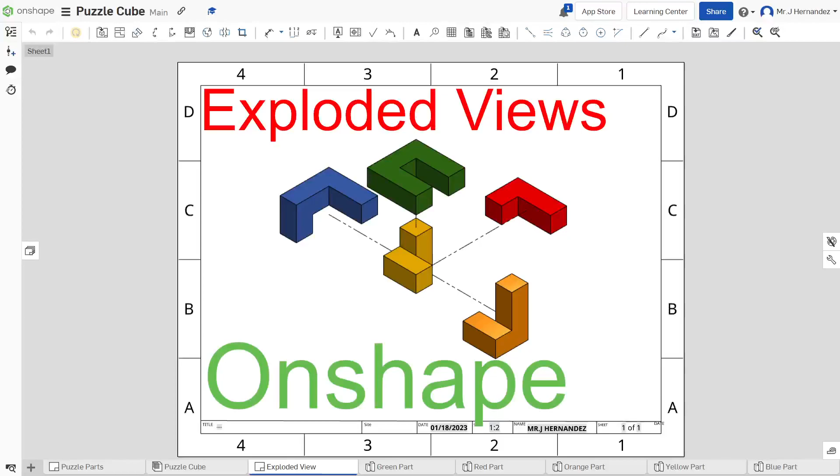So today what we're going to do is take a look at what an exploded view is here on Onshape. This is the final product, a drawing with our exploded view so everyone can see exactly how your assembly is put together and how all the parts fit together. This is really crucial when you have more complex assemblies, to show everybody how these parts fit and move and interact with each other. It's a good way to give someone a good idea of how things are going to work.

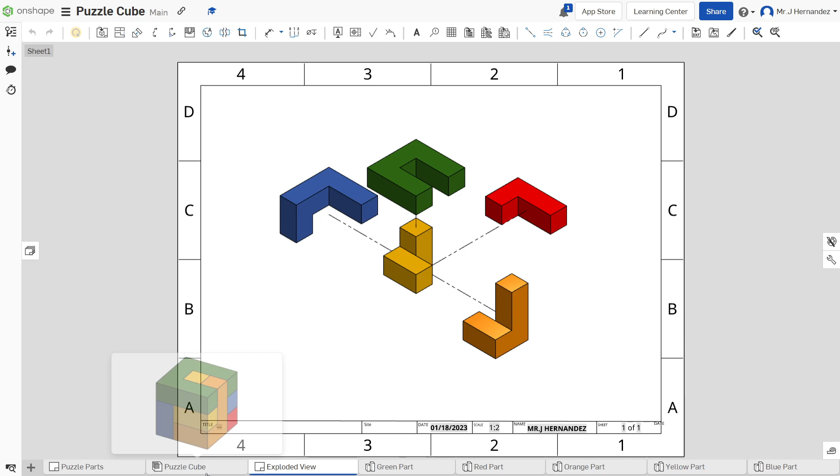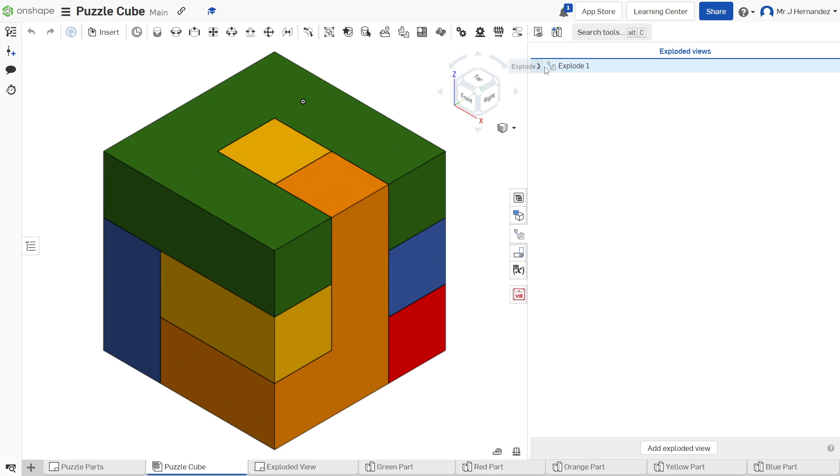So what we're going to do is create our exploded view that we'll put on a separate drawing. I'll show you how this works. The first thing I'm going to do is we need to have our assembly done. So here's my assembly, back to isometric view. I'm going to come over to this side menu right here, to exploded views. This is the first exploded view I made, so I'll come in here and show you how that works.

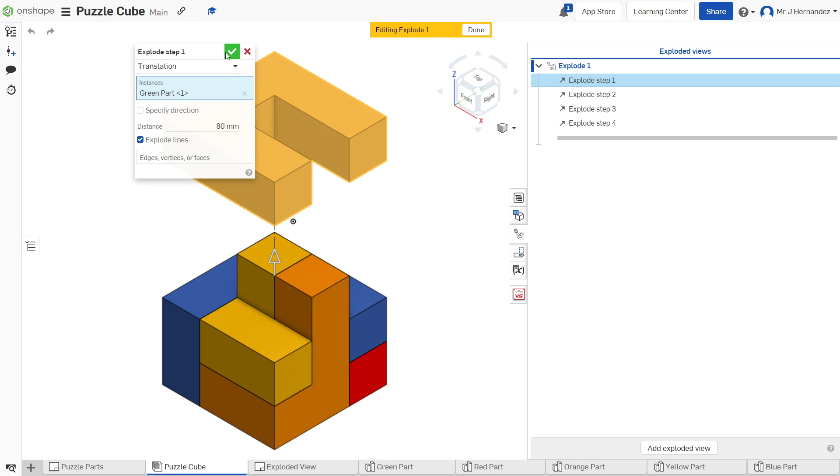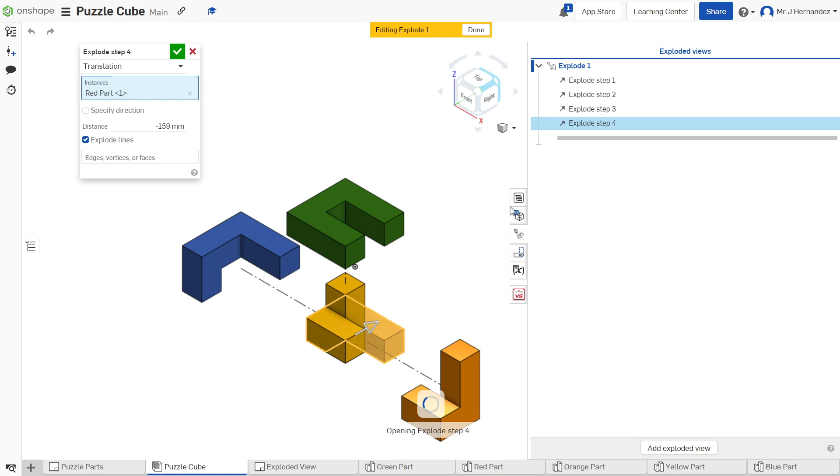As I have the exploded view, I have the ability to create all one per piece. So if I come in here, I can create exploded parts by just lifting the arrows. Now these are the ones I've already made, and as I click through them, you'll see that the parts separate as they go. It doesn't look like it, but as I go through all these steps, they are popped out, and they move according to however I move their parts.

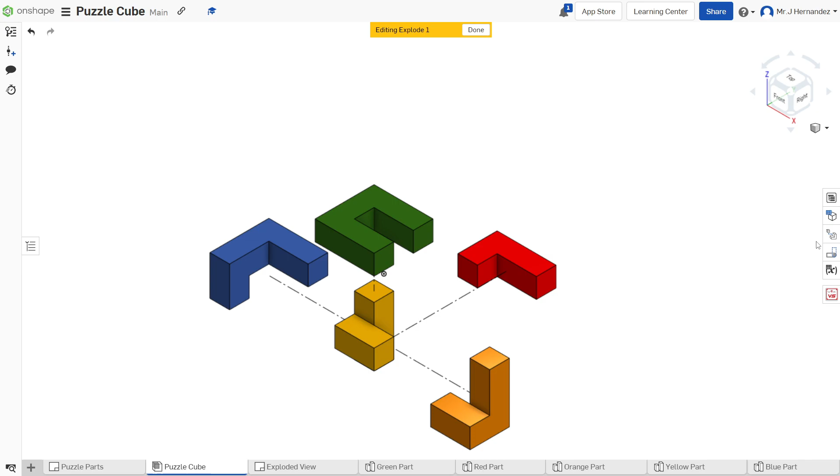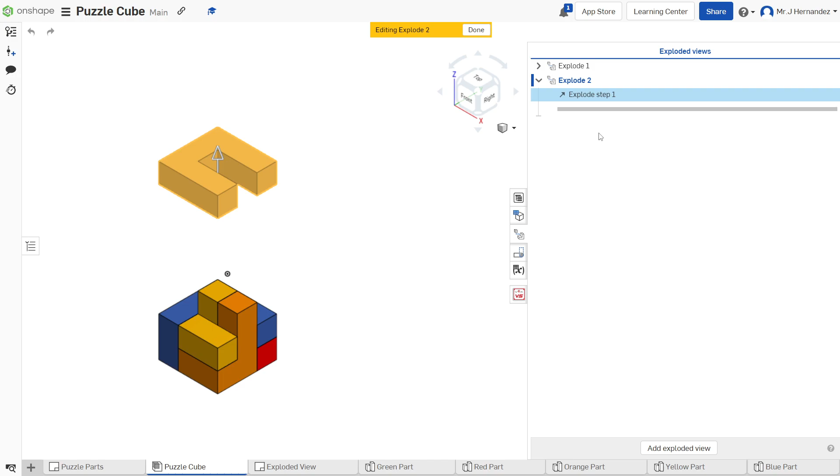So let's create our own exploded view. I'm going to close out of this and start again here, come back in and add an exploded view. Now this is called Explode 2. So all you have to do is click on the parts that you want, and then I'll drag it out. So now every time I grab a piece and move it, it creates a new exploded step. So now you see I moved it a distance. You can specify this distance exactly.

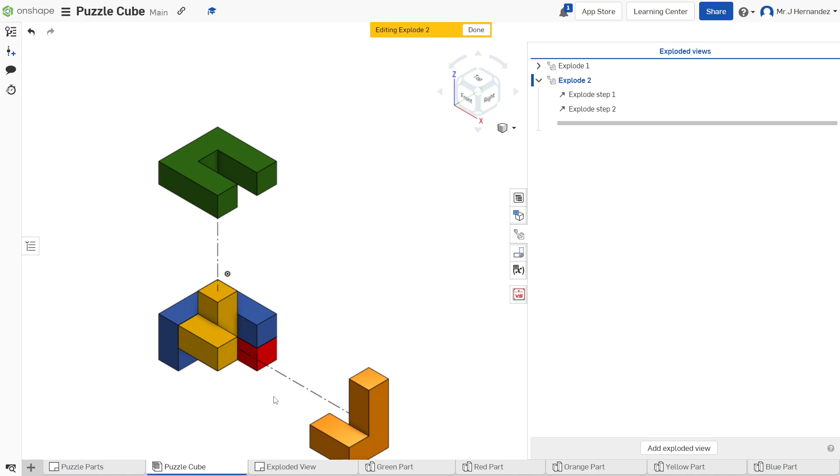You can have what's called the exploded lines, which are these lines that connect it right there. I like to have the lines on there so I can see them. You can also specify directions if you want to give it a specific direction to move, though you don't have to. I kind of like just pulling it myself. Then I'll just hit the green check mark, and do the same thing again: just grab another part, drag it out to where I want, and click. That's it, that's all you need to create these guys. Just click and drag.

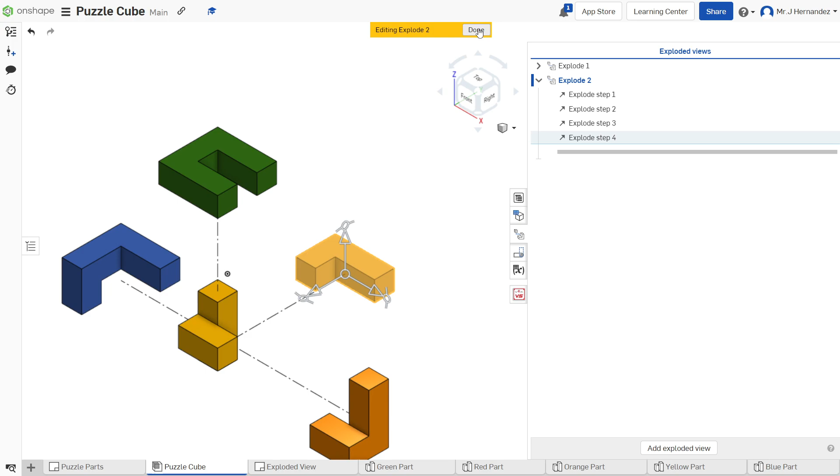I'll just create one more here, take the yellow, pull it out here like that. When I'm done, that's my entire exploded view. So that's all you need to do for an exploded view. Now that we're done, I'll click on this little yellow to done exploding. Now I have my exploded view, but you don't see it in the drawing because it's not permanent. It's there, hidden in the drawing. So now we're going to create our exploded view so everybody can permanently see it, and that we do in a drawing.

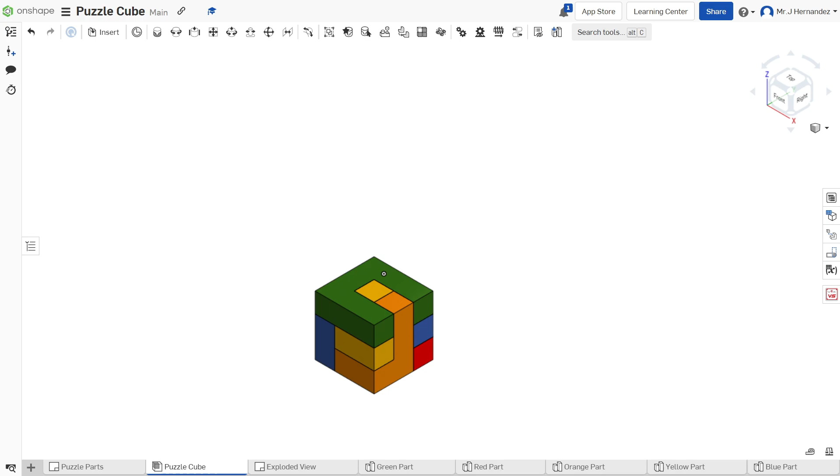Let's go ahead and create a drawing template. I'm going to come over here and click on drawing, and we are going to make that exploded view permanent. So here is my blank drawing, this is my custom template. I have another video if you want to watch that, how to create custom templates. It's really easy. So we're just going to do a simple insert view. Click on insert to pick what we want the part to be. Since all the parts are here, we're going to click on assembly first, then click on my puzzle cube assembly.

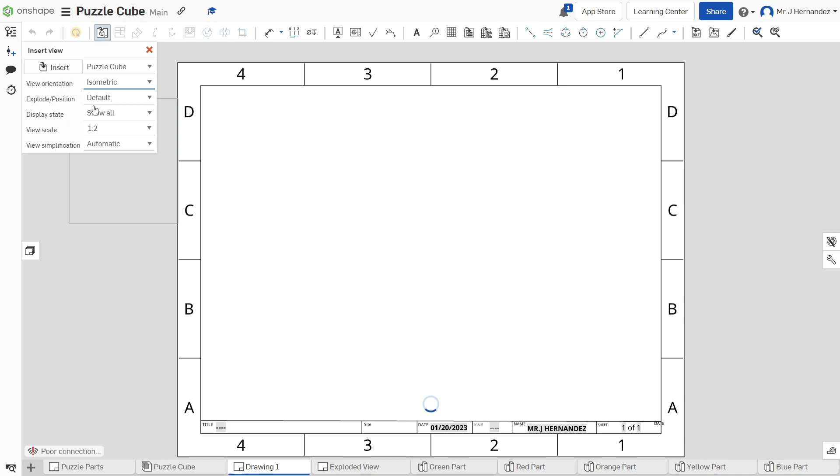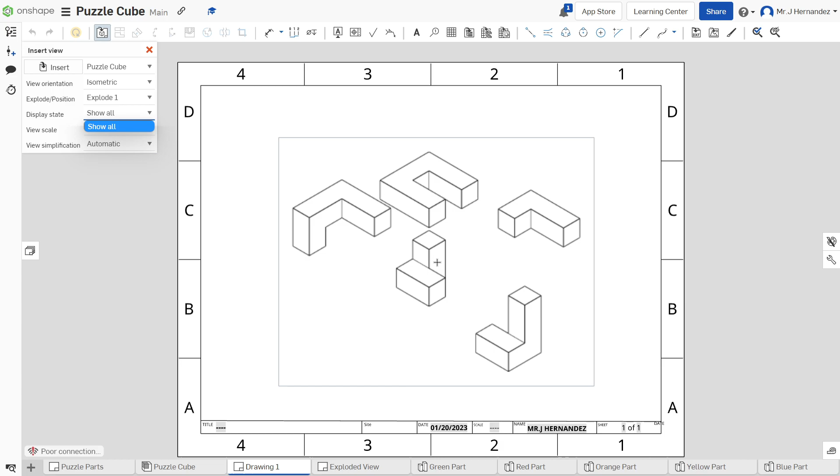Now from here, we're going to click on the orientation that I want. I'm going to go back to isometric. Then I'm going to click here and choose explode position and choose my explosion. Your explosion should be labeled number 1, but since I have 2, I have a choice. So I can have explode 1, choose how big it is, show the state, whatever state I want. Then all I did was go ahead and pin it down, and I'm done.

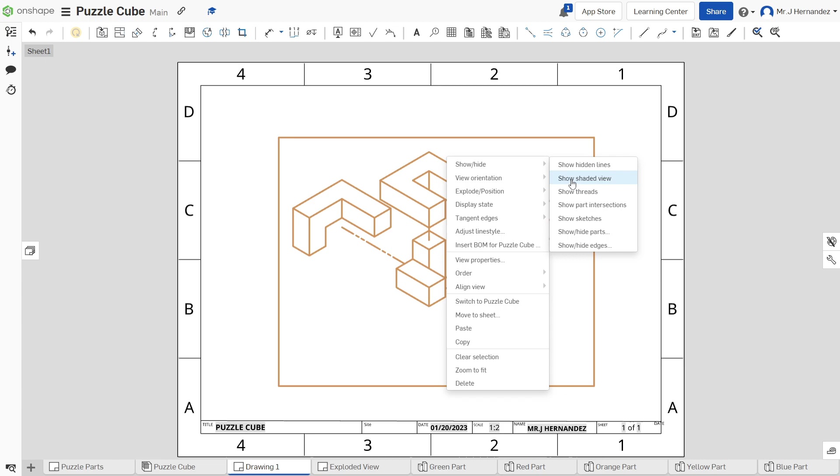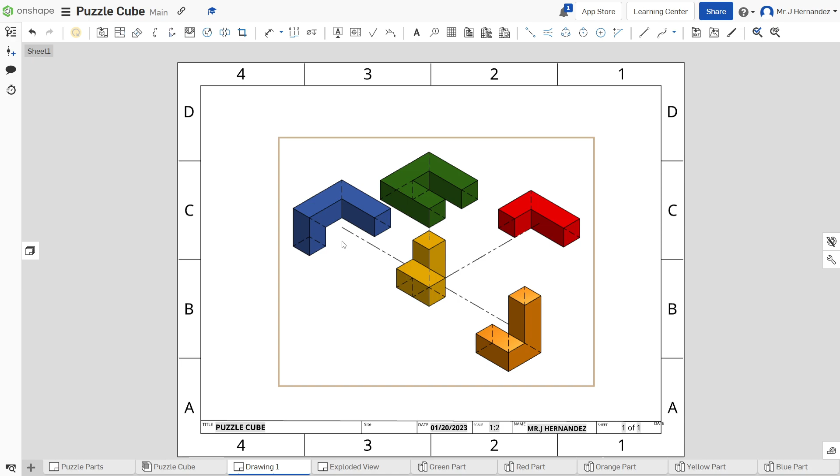So now this is what we have here. Now I can also right click on it, on this drawing, and come in here, show hide. I right clicked to get this menu, clicked show shaded, and I can show the parts with their original colors. I can also come in here, right click again, show hide, show hidden lines. So now I can see all the hidden lines and all the 3-dimensionality of this shape, plus see the colors. Now that gives a whole different dimension on how this is going to work.

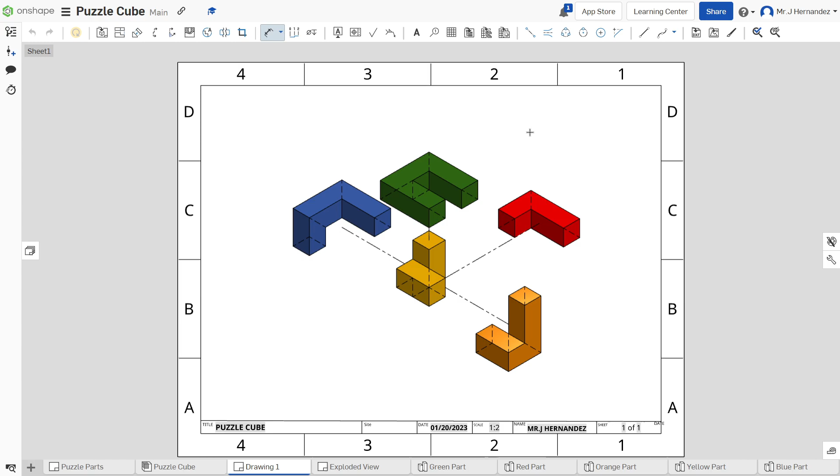Now, I don't like doing this, but some people can if you want to. You can also come in here and put the dimensions on there, but I would suggest you do dimensioning on a separate drawing so that you can have it look more like this. I like this instead of the dimensioning on the explosion. The explosion is busy enough as it is, especially if you have more parts.

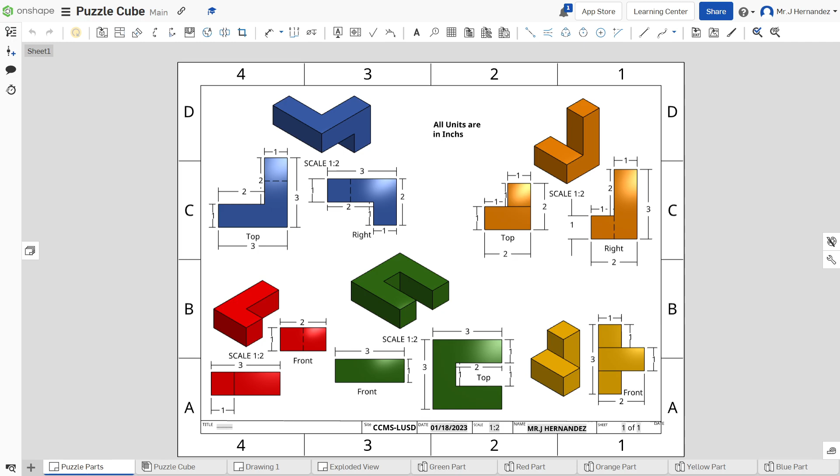All right, so that's it for that. That's how you create an exploded view, and that's how you put it on a drawing. I will see you again soon, and keep working and keep drawing and keep creating. Bye.